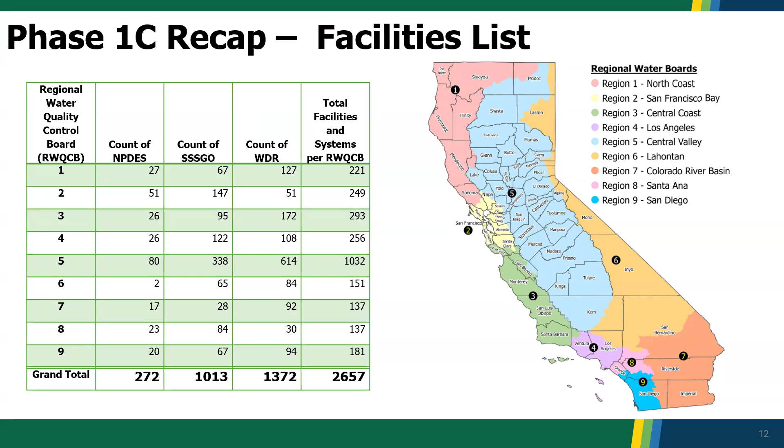And then I wanted to include this figure just to show the breadth of data sources that we're going after. We weren't just looking at treatment facilities. Well, that's obviously very important to the goals of the needs assessment.

There are a ton of supporting data sources that we had to go to, and I want to extend special thanks to both the regional water boards for helping provide us with data, helping us perform QA/QC on our data, and then to CASA for providing us with a number of sewer shed boundaries of their member agencies. There's a lot of work that went in there, so we appreciate their help.

I don't have too much more to say here other than we really appreciate your attention and thanks for spending Friday morning with us. So I'll just pass it on to the next team unless there's a pressing question that I can answer.

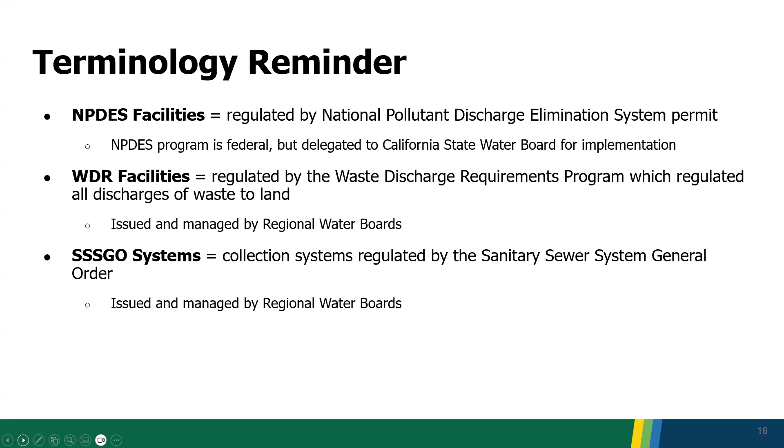We're actually conducting 6 different assessments here on inadequacy and risk, because each of the 3 facility types or systems are in some ways similar but in many ways very different. The factors that go into inadequacy and risk of inadequacy are different for each. There's some overlap, especially in the risk methodology, but there will be separate calculations for inadequacy for each of the 3 types, and the risk methodology is distinct from the inadequacy methodology, calculated separately for every facility and system on the final list.

Grace will provide more details, and all the details on the criteria are both in the phase one report, and I believe there was an attachment with those details as well in the packet that you got for today's meeting.

We've done a lot of work, especially Grace and others, integrating feedback from you all that we got on the inadequacy and risk criteria when we first presented it in January. We've continued to meet with the internal working group of board staff experts on these types of systems and facilities to update the inadequacy criteria. We've begun piloting, actually running, operationalizing the criteria, especially for what we're calling SSSGO systems. And we've submitted a full chapter on this in the phase one report.

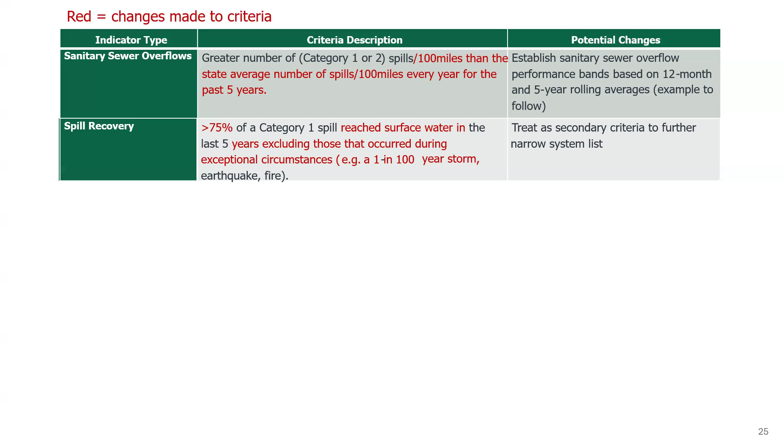All right, the next criteria are focused on reporting. This one has not changed at all. We're looking at systems that have not submitted a sewer system management plan in the last 6 years, or if their existing plan is more than 6 years old.

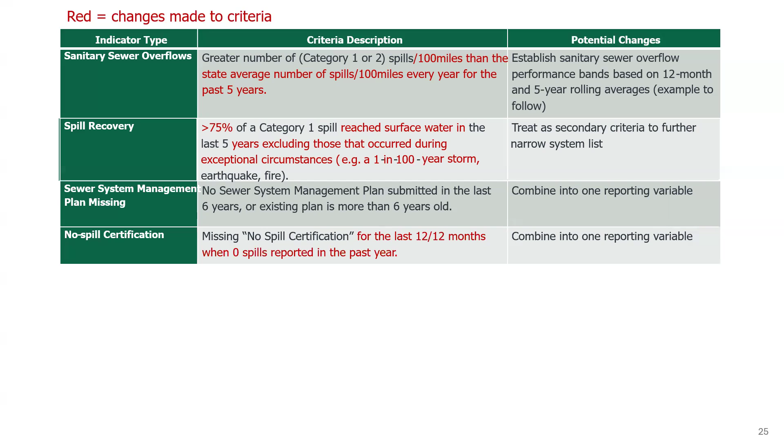This is the second reporting criteria, and this is looking at systems that have not submitted any certification of having no spills that month for an entire year. Essentially, collection systems are supposed to certify that they've had no spills and submit that certification every month that is the case. So if a system is not certified that they have had 0 spills for an entire year, and they're also reporting 0 spills, together this essentially indicates that either the system is not reporting anything, or maybe they're just not reporting their no spill certifications, but something has gone awry in the reporting realm.

And then the third reporting criteria is related to annual reports. So if a system has not submitted an annual report for the last year, that would get flagged. Currently these are all proposed as their own individual criterion, but what we are considering is combining these 3 reporting criteria into one combined variable, so that only collection systems that meet the criteria for all 3 of these would be flagged as inadequate. So again, making that criteria more difficult to reach, hopefully identifying the most seriously inadequate systems.

And then our last two types of criteria in here are related to NOVs and enforcement orders, and these really haven't changed.

The one thing I want to note is that we are also considering treating these as secondary criteria, similar to this spill recovery variable that I mentioned. So that's something we're considering adjusting the weighting for, but these are pretty much the same that you have seen before. I know that's a lot of information.

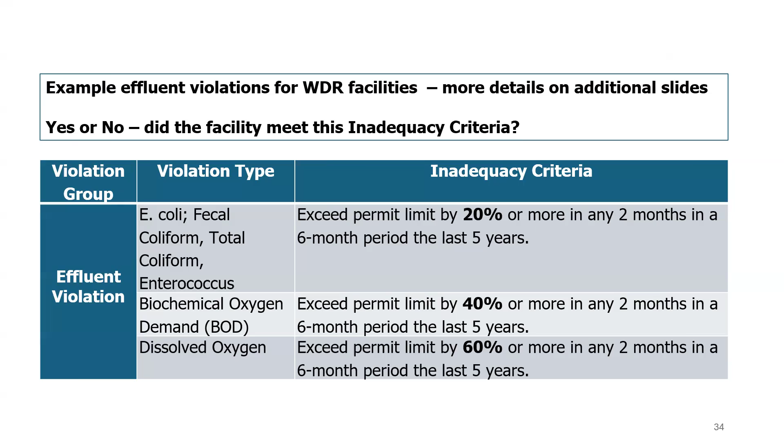And then again, M&R violations, like I described, these are not binary, so we will apply a weight to each specific violation type, and then add up the total score the facility has received to see if they've crossed that inadequacy threshold. We haven't established what that quantitative threshold will be yet, but we'll be working on that in the next few months.

These are not all of the types of different monitoring and reporting violations we'll be looking at. If you want to look at those, they're on the additional slides. But we're looking at whether a system is missing significant required reports, if they're having sanitary sewer overflow violations, and these weights have been established based on regional water board staff feedback once again.

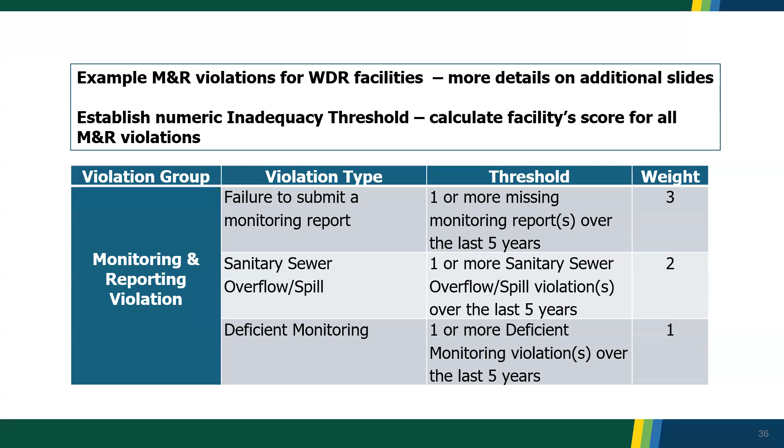All right, we are going to move on to the risk criteria, but first we'll stick with our inadequacy assessment and discuss our next step, so what you all can expect to see moving forward. We are nearing the end of developing the inadequacy criteria for our different system and facility types. We still have it included because we want your feedback and want to continue incorporating it. But at some point we've got to get to the second step where we start doing the data analysis, operationalizing the criteria, and creating these initial lists.

When we have the initial list, we'll start by sharing it with the wastewater needs assessment project team. Then it will most likely go to the executive leadership team and the regional water board so they can review the lists and let us know if the systems we've identified seem reasonable, or if there are large gaps we've missed. Then that list will go to you all at the advisory group, which we'll present and share at a future meeting. Finally, we'll be publishing a public-facing list of these inadequate systems and facilities, but that's in the final version of the report.

All right, so now we're going to move on to our risk criteria, and then we'll close out.

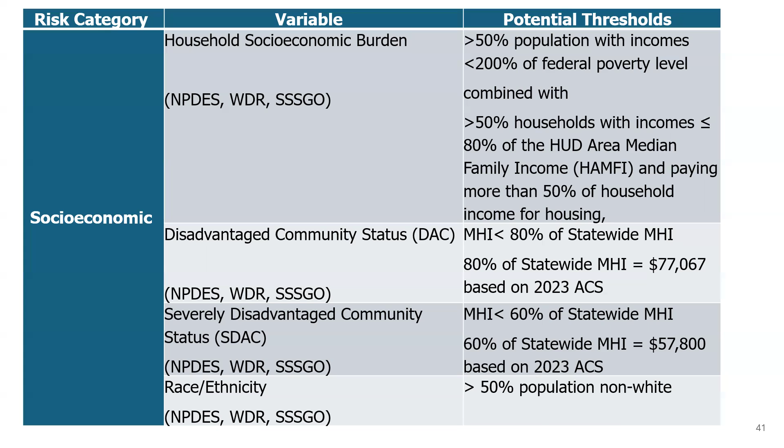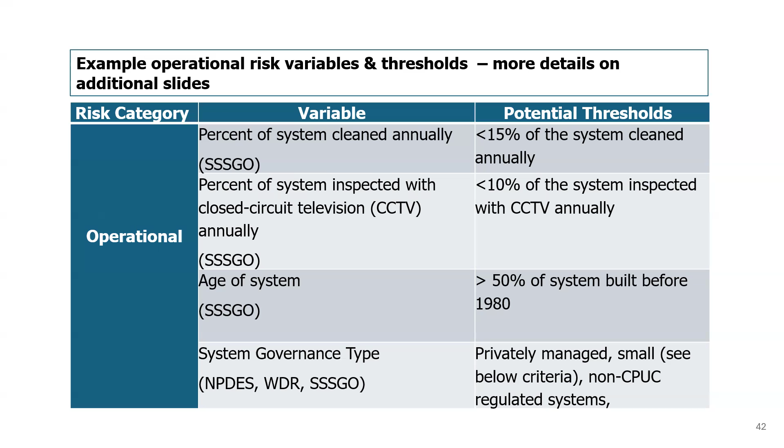Yes, hi, thank you. I had a question about the public health one where you mentioned that CECs might be an indicator. I'm a little confused what the linkage would be between a direct impact on public health from CECs that might be in our effluent, for instance. I'd think a public health indicator would be more like a spill or an overflow in the street in a neighborhood - there's a lot more potential for direct public contact that's a primary concern to us, for instance if we have a spill and we're trying to clean up and make sure there's no exposure. So I'm confused about where the CECs come into the picture here. Obviously big picture, yes, but we don't have any standards for them, which is why they're considered emerging, so I don't really know how you would use them as some sort of indicator.

Yeah, and this might be one where it was grouped like this originally, but I think it almost makes more sense as an operational variable. The concept here is that if a system has constituents of emerging concern present, there might be additional regulatory thresholds they're going to have to comply with that are going to be more complicated for the system to comply with in the future. So from that framing, it's more of an operational risk variable. I think it was originally placed here because it originally came to us as a public health concern.

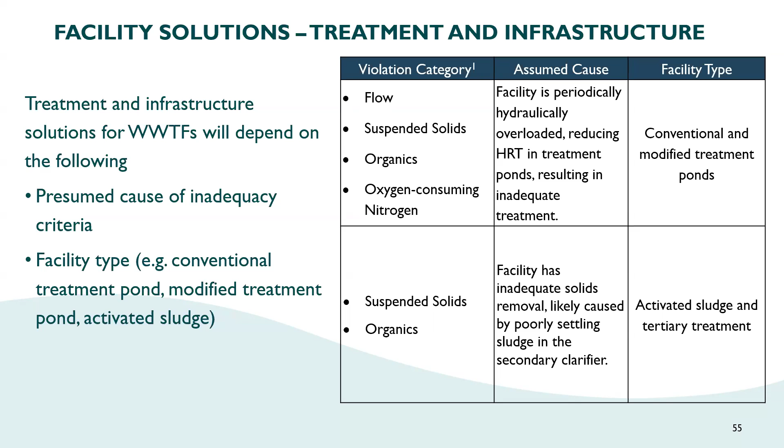The second example is similar, just without the flow violation—the facility is having trouble with biological treatment, but likely due to some other cause besides higher flows. We did this for all the common violation combinations and facility types, and used these to identify remedial actions commonly used to address each cause. From this, we have matrices with violation combinations, assumed cause, facility type, and a menu of remedial actions, which we use to create the treatment solution package.

Here's an example of the table—a shrunk version, but the full tables are in the report, and I'd be happy to go over them more in office hours. Again, we have violations, assumed cause, facility type, and we assign different remedial actions to address each assumed cause. For example, the first is the periodically hydraulically overloaded facility. In this case, there's likely infiltration and inflow in the collection system if it's receiving high flow fluctuations, so that would be an assigned remedial action. We might consider installing a storage basin to accommodate excess flows, and rehabbing the treatment ponds—like desludging—to provide more adequate treatment.

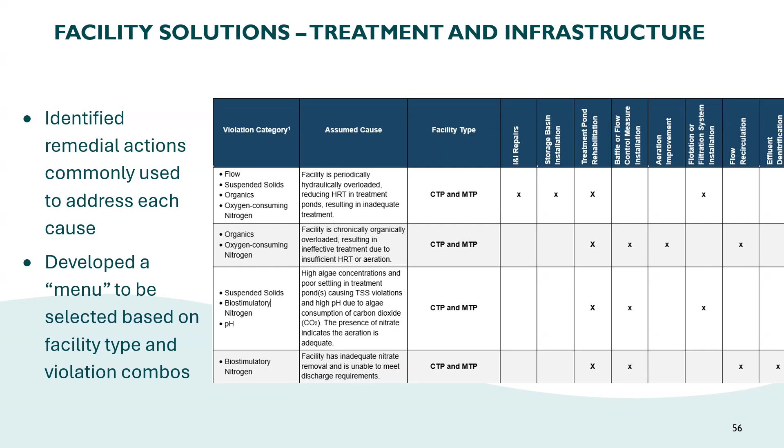All right, this slide has a lot of text, but these are all the remedial actions for the treatment plants we're considering. These will be assigned depending on facility type and the specific inadequacy criteria, and combined into that facility's specific treatment package. When we scale them to assign a cost, they'll be scaled by design flow, with the exception of infiltration and inflow repair, which is scaled by miles of pipe.

One note on that: in our facilities list, we've separated collection systems from treatment plants, but in reality, inadequacy in the collection system directly impacts the plant. So we're still trying to flesh out how we'll address plants that are having operational issues, likely because their collection system has a lot of infiltration and inflow and is inadequate, without double counting.

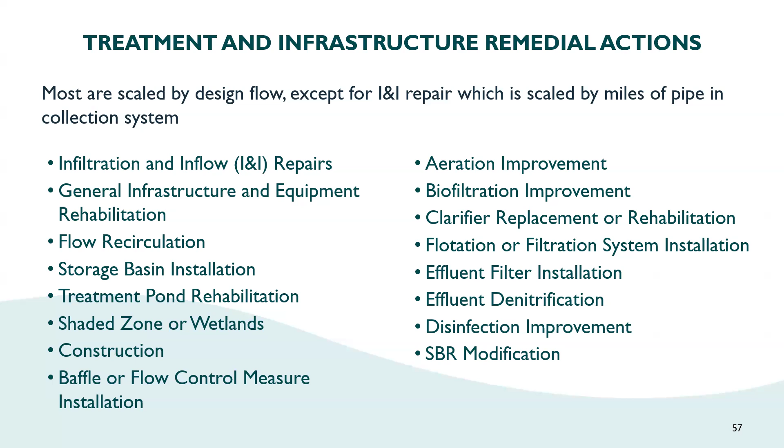All right, and then there's two other solutions for facilities. In some cases, a facility's infrastructure is relatively old and outdated, and if you're going to have to go through several remedial actions, it might be worthwhile to just replace the entire facility.

In this case, we'll come up with packages that are basically an average cost of what it takes to replace a certain facility type. Then we'll compare that to the cost of connecting them to another facility, so that we'd decommission the old wastewater treatment plant and send the flows to a new one. That depends on whether there's an adequate treatment plant within a certain distance to actually do that. If not, we'd consider facility replacement instead of doing a bunch of band-aid remedial actions—it might just be best to replace the whole facility.

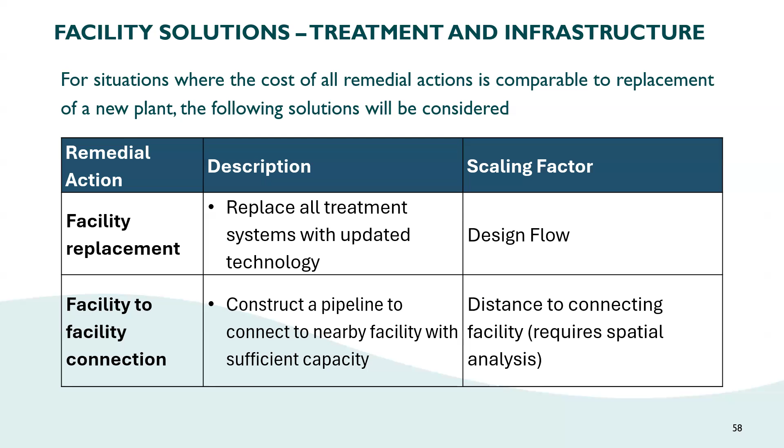We've seen examples of that in some engineering reports. All right, and then just to go through the process.

I discussed a little about how we're going to package these together. So we'll have an inadequate facility, go through our remedial actions table, create that package, and estimate its cost. We'll also have a separate cost for facility replacement for that facility type, and compare them. If the cost of remedial actions is comparable—we're still working on a threshold for this—to the cost of an entire facility replacement, we'll look at whether it's feasible to connect this to another facility. If it is, that's what we'll go with; if not, we'll look into replacing the facility as a whole. If the remedial actions are significantly cheaper, we'll just go with that package.

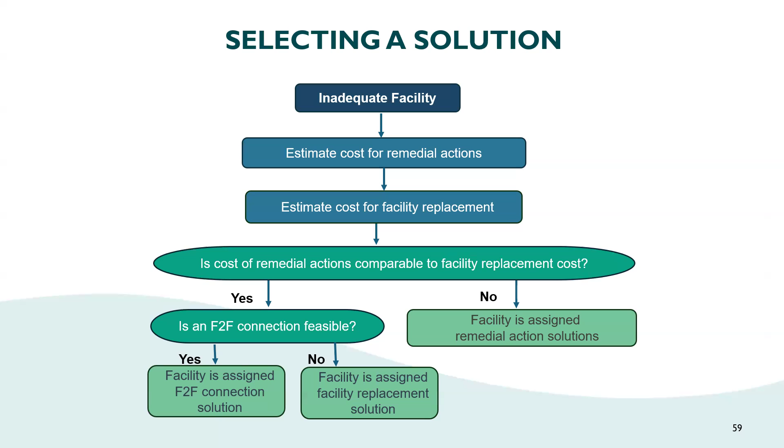Did I skip a slide? No, okay. So moving on to the collection systems.

The solutions we're looking at to address infrastructure and operational inadequacies are either a focused pipe replacement—spot replacing pipes or lining pipes that exceed their useful life—with the scaling factor being miles of pipe beyond useful life.

Then, a step up from that—and we're still working on the threshold for deciding between focused pipe replacement versus widespread rehabilitation—would be replacing a significant portion of the pipes beyond their useful life. Within this, we'd also include a monetary allowance for constructing new utility holes and other infrastructure, scaled by miles of pipe in the collection system, which we have from the questionnaire data. In some cases, we might also have to reconstruct some pump stations, either replacing or rehabilitating them.

So for that, it would just be replacing those pump equipment, installing monitoring and control equipment, repairing and installing a backup power supply, and the scaling factor for that would be number of pump stations or average pump station age. We're still kind of deciding between those two.

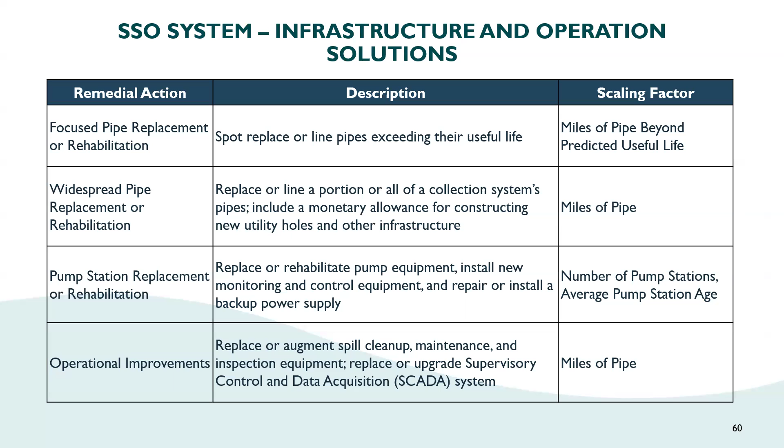And then we have remedial action for operational improvements. This would just be a response to the facilities that are inadequate because of inadequate spill cleanup or other things indicating that it's not necessarily that they need an infrastructure upgrade, but they just need assistance with operating and maintaining their system. So for this, we're looking to either replace or augment their spill cleanup, maintenance, or inspection equipment, or possibly upgrade a SCADA system for them. We're probably going to scale it based on the size of the collection system, so miles of pipe.

And then going into the administrative solutions. As I mentioned earlier, these will be combined with the treatment and infrastructure, or infrastructure and operational solutions, for either the facilities or the collection systems. We're happy for any feedback on these. This has probably been the more difficult one to come up with because it's hard to get cost data or examples in engineering reports from these.

But the solutions we're looking at are technical assistance. Similarly to the drinking water needs assessment, this would be a monetary allowance to obtain technical assistance. This could be used to address monitoring and operational issues, so any facilities that have deficient reporting, this would be a solution they're assigned. Or it could be to conduct an I&I or source control study for the collection systems, or develop an SSMP. So this is really to address the inadequacy criteria that are more reporting or planning and annual reporting related.

Administrative assistance is just a monetary allowance to help them improve their SCADA software or develop databases and reporting outlines, and we're hoping to include some sort of allowance for training, but again, we're still looking into how to cost that. Administrator appointment would be an interim administrator appointed by the State Water Board. And then operational assistance would be a monetary allowance to either employ a contract operator, specifically in cases where we're upgrading the facility and it's going to be a higher grade.

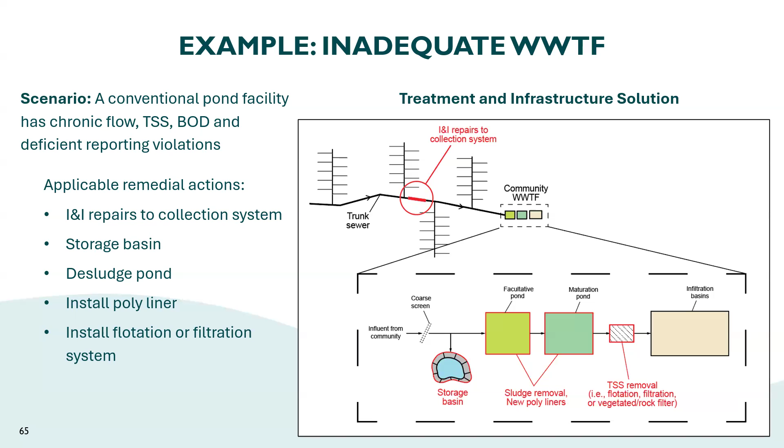So those are our remedial actions.

And then to address the deficient reporting violations for this system, we're going to assign technical assistance if it's a disadvantaged community, and we're also going to assign administrative assistance, so maybe upgrading their SCADA or monitoring software. The technical assistance would really be to help them come up with a monitoring and reporting plan. So our solution package would be both the treatment and infrastructure solution, and also the administrative solution. And that's all I have.

And I'm going to turn it over to Jonathan to talk about how we're going to estimate costs for these.

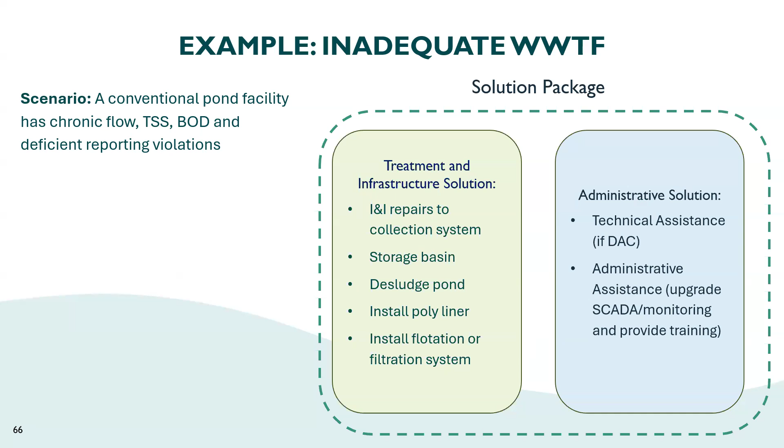Thank you, Caitlin. Jonathan Kaplan, also with the Office of Water Programs, and I will be talking about the cost assessment methodology that we put together. Next slide.

Thank you. Just to reiterate something we've heard before, just want to clarify what the cost assessment is and is not. It's an informative analysis of estimated costs statewide, evaluating a narrow range of possible solutions. We recommend that communities conduct a detailed evaluation of their unique wastewater challenges in order to identify a range of possible solutions and costs to select the best path forward.

What this assessment is not intended to be is used by the state board or any community to inform community level decisions. Again, this is at a very high level, and so in order to provide that assessment, we have to keep it at that high level. So it includes many assumptions about local needs, capacities, and solutions. We clearly do not want this to be used by the board or communities to inform their decisions at the community level. It's also not intended to be used by the water board to make funding and assistance decisions. Again, those would have to be done on an individual basis with individual assessments of those particular systems and facilities. Next slide, please.

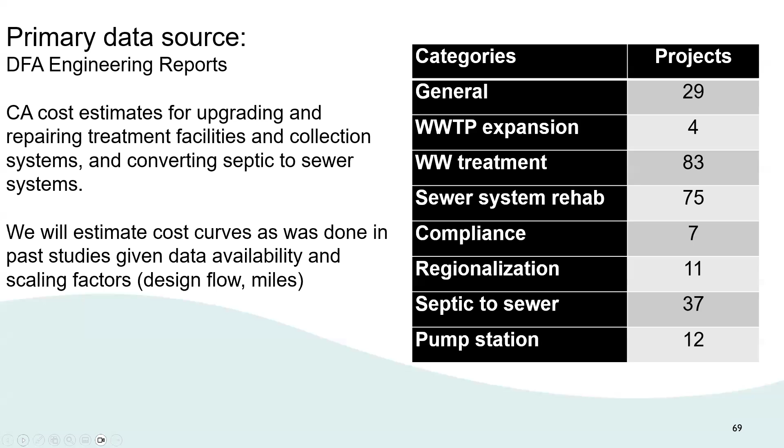Next slide. As I mentioned, we want to reiterate we'll be estimating cost curves with this data, as was done in past studies, given the availability of data on design flow and miles of collection system available. Next slide.

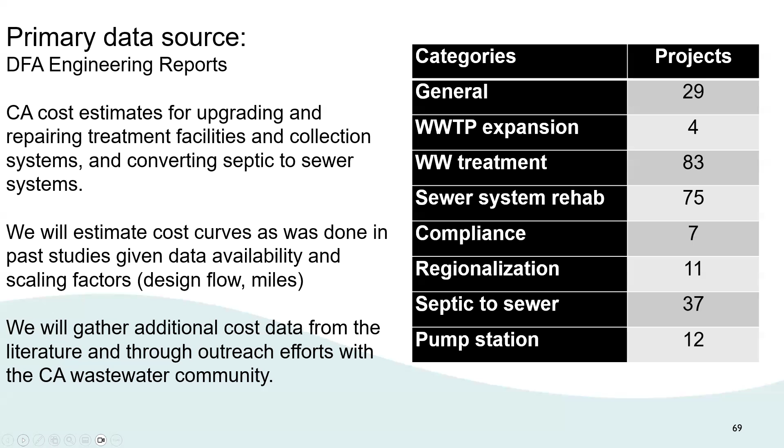Thank you. And if this isn't sufficient, if the engineering reports aren't sufficient in providing us the details for all the costs, we certainly have been reviewing the scientific literature and have data from other sources that we can rely on. Ultimately, we may also be reaching out to many of you in the wastewater community to find out more about costs related to some of these solutions, primarily the administrative and managerial solutions that may arise within these solution packages. Next slide. Thank you.

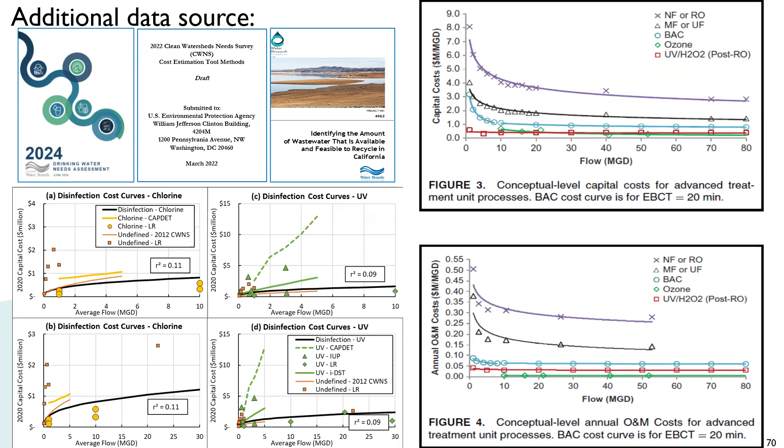Just to give you a sense of some of the alternative cost curves that are out there, we'll be relying on this literature to fill in gaps that the engineering reports will not cover. These are reports from both the Water Board and the Clean Watersheds Needs Survey that was done by the US EPA. There's a wealth of cost curves in there that we hope to rely upon to fill in any gaps that the engineering reports haven't filled in. Next slide.

To categorize the different costs that we'll be compiling: there are capital costs, operation and maintenance costs, and the managerial or technical assistance costs.

The capital costs will involve the construction and installation of any treatment technology, collection system, or other infrastructure. As was done in the drinking water needs assessment and in many of the engineering reports, there are additional capital costs, sometimes referred to as soft costs, added to the capital cost estimates. Those often entail electrical expenses, engineering service design fees, project management, permitting, and construction and administrative activities that go into constructing or replacing the capital that's needed.

There's also operational and maintenance costs associated with the annual consumables for these different technologies that will be replaced, based on a 20-year annual expense consistent with the drinking water needs assessment and the engineering reports. The last type of cost estimate we'll derive for the solution packages is the managerial assistance costs, which deals with technical and administrative support to address the inadequacies identified in the inadequacy list.

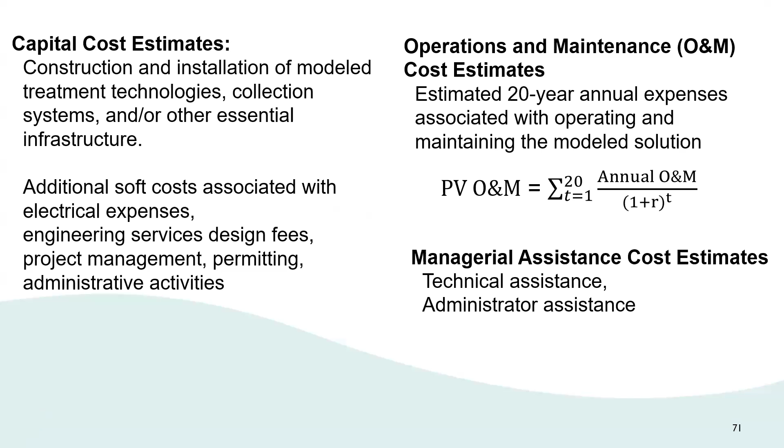To give you a rundown of how these costs will be assembled: first we will identify the line item capital, O&M, and managerial assistance costs associated with each solution package we identify. We'll assemble those costs from DFA data in the literature, then estimate capital costs, net present value of operations and maintenance costs, and managerial costs. We'll initially put those in 2025 US dollars, but in the final report convert them to 2026 dollars for the most up-to-date estimates.

The capital costs will then get cost multipliers associated with various soft costs, as well as any regional adjustments needed between urban, suburban, and rural areas. For cost estimates we'll use RS Means, which is common practice. We'll also update any costs from old engineering reports using the California Consumer Price Index for urban consumption, as was done in the drinking water needs assessment, and adjust future costs using the CPIU as well, accounting for other soft costs applied to capital.

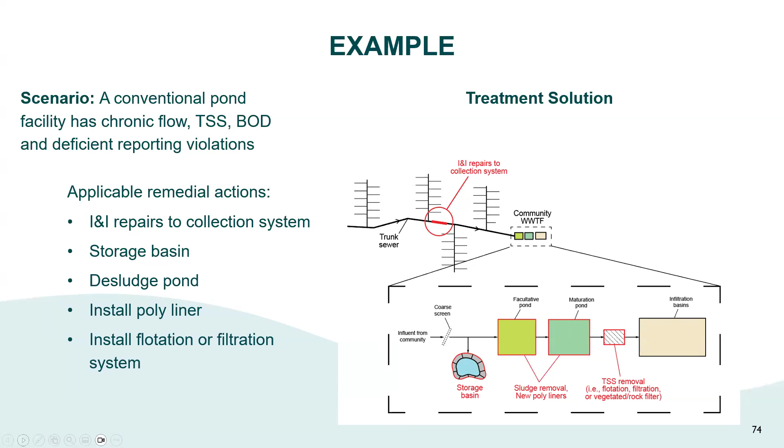As we saw earlier, there's a treatment solution component as well as a managerial assistance solution, which follows from our earlier slide. As mentioned, that comprises our solution package.

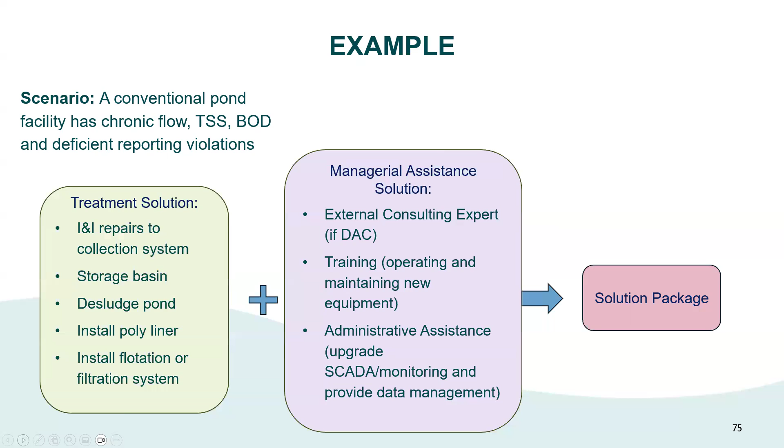For that particular package, we have different I&I repair costs, effluent filtration costs, basin sludge removal, and liner installation costs, and presumably those would all be scaled on million gallons per day based on flow rate. Some of those capital cost improvements or updates have O&M costs associated with them, and some don't, so as we go through the costs we're identifying those solution elements within the package that have O&M costs.

Those would be aggregated to come up with the total O&M costs. The total capital cost would be a summation of those individual capital expenditures, and we would add the soft costs to those capital costs. We would then associate that with managerial costs, as shown on the right-hand side of the figure. Depending on the flow for the particular system, this would determine our total capital, total O&M, and managerial assistance costs. We'd sum those up to get our cost for that solution package for a particular facility.

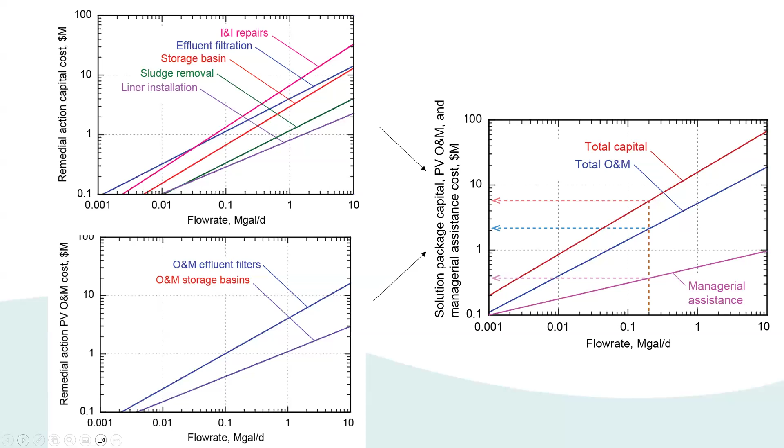Just to get a little bit deeper into these soft capital cost calculations, here's a breakdown based on some of the work that's been done in the drinking water needs assessment. These percentages for the various soft capital costs are hypothetical. We are reviewing the engineering reports to come up with the necessary percentages to use for wastewater treatment. These are arbitrary, but in order to incorporate installation, electrical, general site, overhead, profit, contingencies and so on, we would apply different multipliers in the same fashion.

Consumables would be considered part of the regionally and inflation adjusted treatment costs. We would then add a charge for overhead and profits for construction, and contingency, in order to get our total construction capital costs. Then we would add additional costs on top of that for planning and engineering, legal, administration, compliance and permitting, and construction administration to arrive at our total capital costs. Again, this follows from the methodology used in the Water Board's drinking water needs assessment.

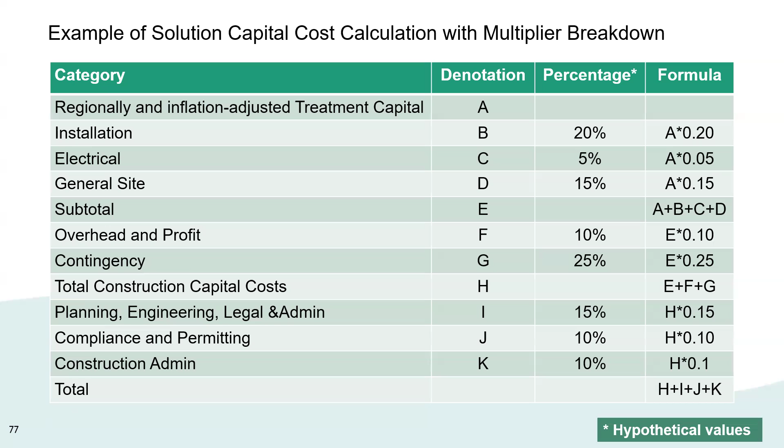Next slide, please. There are still some topics we're ironing out. As Caitlin mentioned earlier, we may be evaluating whether to replace a facility or connect it to another facility. We need to have a trigger or threshold to decide whether and when replacing a facility is close in cost to regionalization or connection to another facility.

Similarly, we have a threshold for collection systems. What hasn't been discussed much now, but will be discussed after our break, are unsewered systems and how those would be grouped together in order for us to identify connecting from septic to a sewer system that's already in existence, or whether to do septic to community cluster system, that's S2CC, or whether to not connect or build a package system for these on-site or unsewered communities.

Or groupings. There's also non-economic factors that we may want to incorporate into the solution package selection. As was done in the drinking water needs assessment, there was a criteria for sustainability. We've seen in many of the engineering reports there are also criteria for selecting different solutions. These range from climate change impacts, operational simplicity, footprint for the facility, reliability, future regulations of compliance. I have a whole long list here, but we need to define what the evaluation criteria will be for selecting one solution versus another, if there are important factors other than the cost of the solution.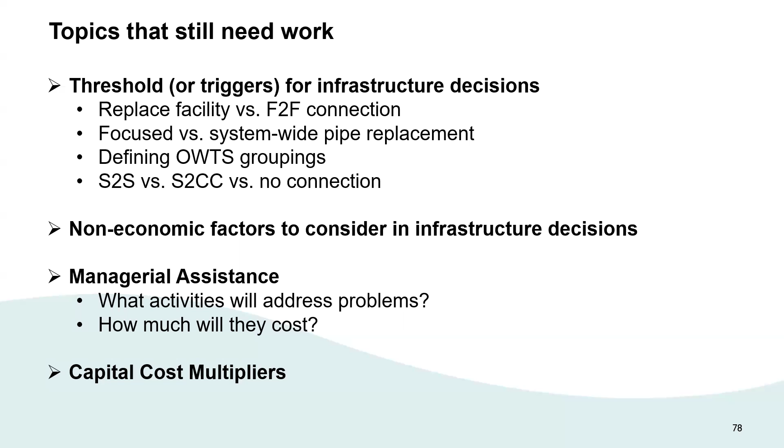Thank you, Paul. And with that, I do think, for the sake of time, we can take our break now.

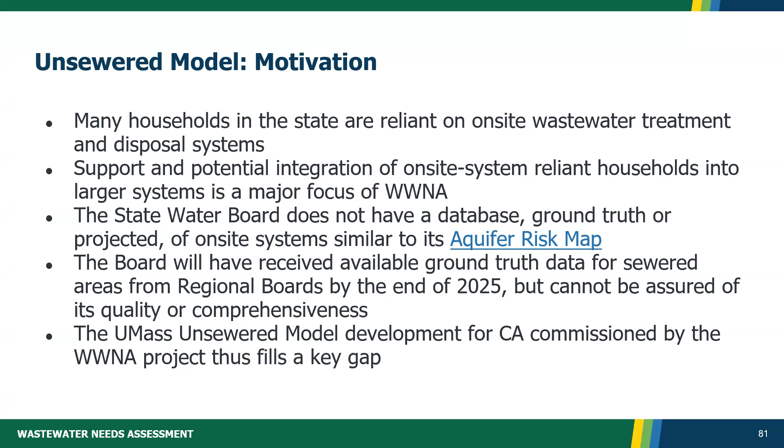So I first want to give some motivation behind why we are using a model for unsewered areas. Many households in the state are reliant on on-site wastewater treatment and disposal systems. The support and potential integration of on-site system reliant households into larger systems is one of the focuses of the wastewater needs assessment. But the State Water Board does not have a database, ground truth, or projected set of on-site systems for the state that's, for example, similar to something like the Aquifer Risk Map. The board will have received available ground truth data for sewered areas from the regional boards by the end of 2025, but we cannot be 100% assured of the comprehensiveness of those. So the UMass unsewered model and its development for California has been commissioned by the Wastewater Needs Assessment to fill a key gap.

Before we get too far into some of the details, some caveats and important pieces of information to keep in mind about the model and this overall approach. When we have a model, the predictions made are good approximations to the best of our knowledge. They're not necessarily a guarantee of 100% accuracy, but with the information that we have, they're good approximations. The model we're presenting is not going to be used as part of the wastewater needs assessment to inform regulatory actions or identify concern labels. In relation to privacy concerns, the model is not going to publicly display parcel level information in the wastewater needs assessment or elsewhere. And finally, the model fills a data gap in the absence of complete ground truth data for unsewered areas. In the future, if California has complete data on onsite systems and other unsewered system solutions, then there would not be a need for the model. Next, please.

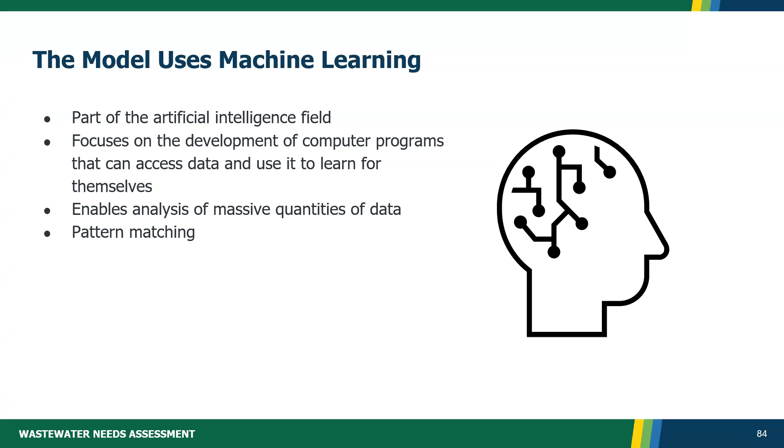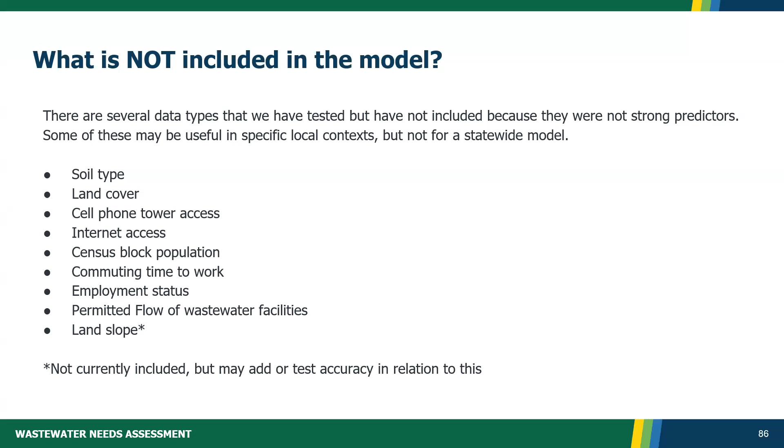I'm going to talk a little bit more about how the model ends up outputting results. So I have some terms here.

The model makes classifications and generates labels in two stages. In the first stage, it's yes or no: yes, there's a need for a sanitation system on this parcel, or no, there isn't. In stage two, there are two categories of sewer: this parcel is served by a wastewater collection system, such as a sanitary sewer, or it's on-site, meaning the parcel has a sanitation system but is not served by a collection system. This includes things like septic tanks, cesspools, leach fields, and similar systems.

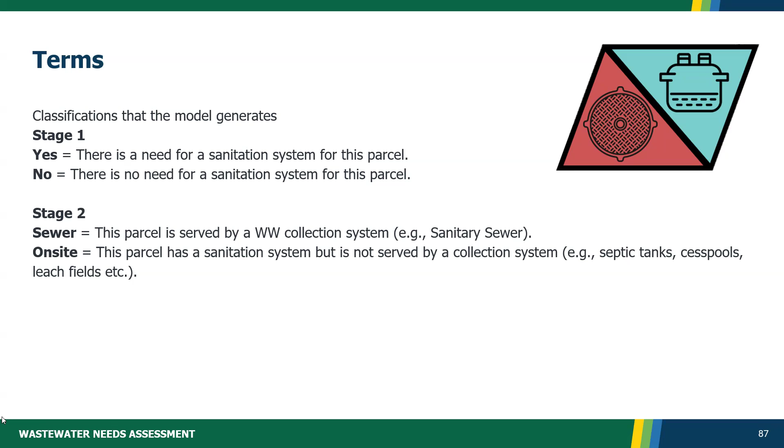So what does our model output for each individual land parcel? It first gives us a prediction in the second stage of whether something is served by sewer or on-site. It also gives us a confidence value, which is how the model expresses certainty about what class the input data belongs to. For example, on a scale of 0 to 100, how confident are we that this parcel is served by a sewer system or an on-site system?

Accuracy is not a direct model output, but we're able to calculate it if we can compare to ground truth data. Accuracy in this context is a measure of how many predictions are correct out of the total number of predictions the model makes. A bit of an imperfect analogy here, but if we think about a target, accuracy would be saying we can look at the target and confirm that we hit the bullseye. Confidence, on the other side, would be saying something like, even though we can't see the target, based on what we know about other targets and how we approached this one, we're 85% sure that we hit this bullseye.

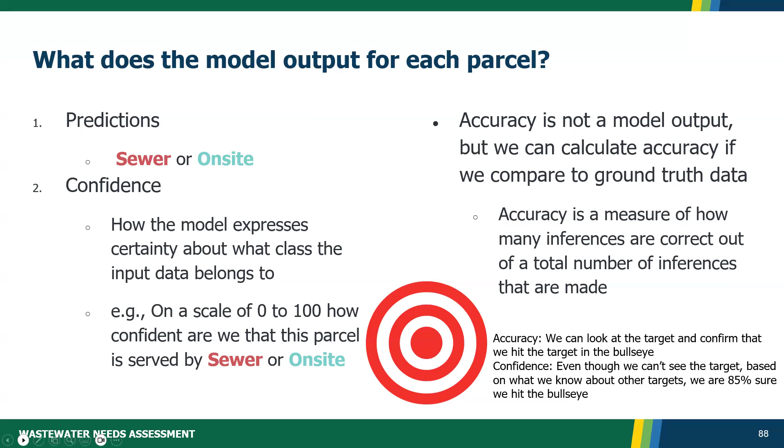As I mentioned before, we use a variety of sewer and on-site labels to train and then test our model. We use data from several places throughout California, as well as some other places throughout the country, but I'm going to focus on the ones in California here for a few moments.